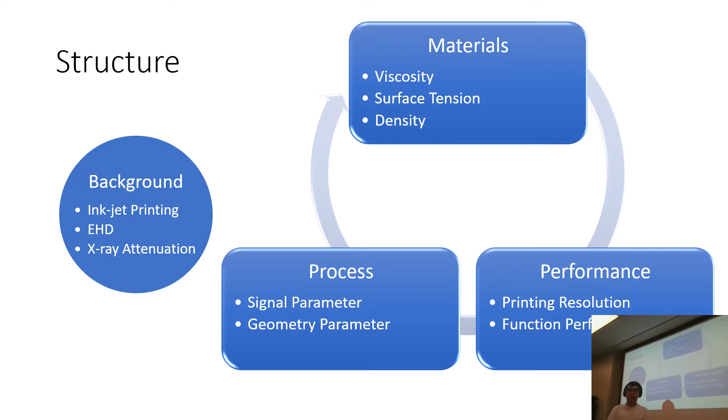This is the overall structure of what I'm going to talk about today. We'll first talk about the background, giving several introductions on the mechanism and application, as well as some basic background information for evaluation and characterization. After that, we'll jump into materials, since there are several material factors that impact this process. Since we're impacting the process, we'll discuss what kind of process we can control electronically as well as the geometry of the actual printing. After that, printing performance is evaluated both for resolution as well as some functional performance such as X-ray or height stacking performance.

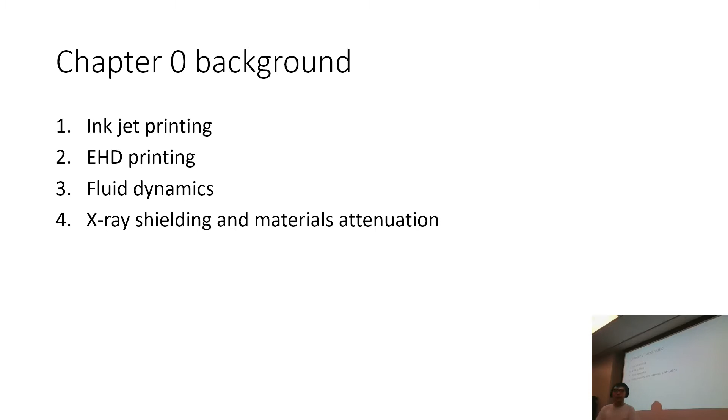So let's go to the background. We're going to introduce some background on inkjet printing, EHD printing, fluid dynamics, as well as X-ray shielding and materials attenuation. For inkjet printing, first we initially created the so-called continuous printing, indicated here.

For continuous printing, the droplets continuously deposit on the printing substrate. If they don't, there is a separate mechanism to collect all those unwanted droplets into a recycle process. However, this recycle process creates a lot of troubles, so developers started to think about reducing or eliminating this mechanism.

This led to the droplet-on-demand type of method. These methods only produce droplets when required, so there's no waste of ink droplets.

Later on, there were two different mechanisms or styles for DOD printing: one is vapor or thermal, one is piezoelectric. For thermal, the ink needs to be vaporized to create a bubble, so the ink can be pushed out to form the droplet. Otherwise, piezoelectric materials induce acoustic mechanical waves to eject the ink droplets. These methods were developed by HP, Canon, Epson, and Brother.

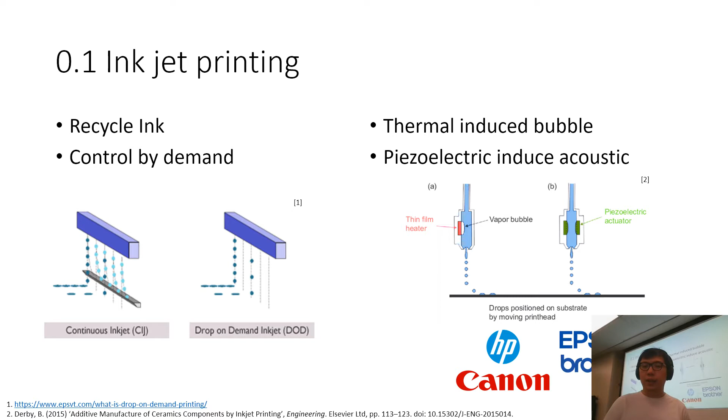Later on, depending on the requirements for resolution of inkjet printing, we need higher and higher resolution, so EHD came out. Both thermal and piezoelectric DOD are based on hydraulic pressure - no matter if it's vapor pressure or mechanical wave, it's hydraulic. However, if we need additional forces, electric forces come into play.

So we have a computer-controlled pressure regulator as well as a voltage signal generator. With an amplifier, we have enough voltage to control the electric potential accumulated on the tip of the nozzle.

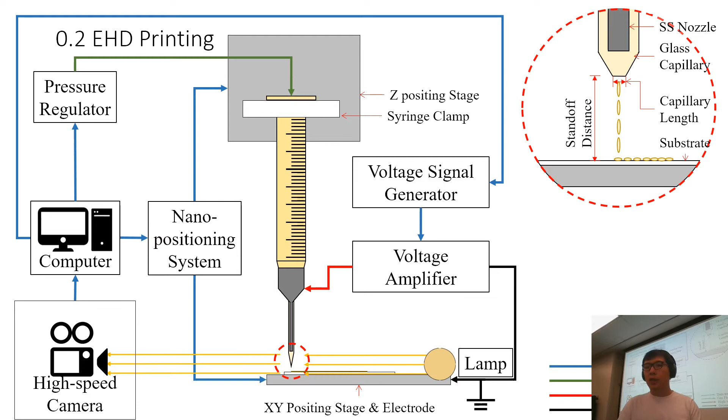Then, with the nano-positioning system as well as a high-speed camera, we can capture images during actual printing. This is what happens at the tip of the nozzle when printing occurs. An electric signal comes in with a certain voltage, and with certain material properties, a single droplet smaller than the nozzle can be created and deposited on the substrate. Later on, we can examine it by microscope.

Why EHD? As previously mentioned, it increases printing resolution and doesn't require materials to be vaporizable like thermal DOD does. For piezoelectric DOD, there are certain limitations on viscosity - we don't have that, and we can do fast prototyping for small features, which is why EHD comes into play.

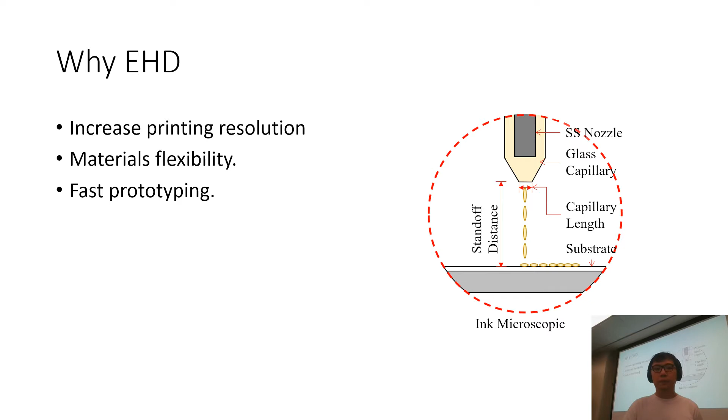For fluid dynamics, this is a typical guideline on material properties - how material properties come into play for ink formulation design. There are two significant numbers: one is the Weber number, one is the Reynolds number. These two numbers are used to guide the formulator in designing the ink.

Typically for traditional inkjet printing, DOD or continuous inkjet printing, the Z number, which is 1 over OH - here is the OH definition - needs to be smaller than 10 or larger than 1. However, with additional electric forces, we can expand this limit of 10 up to 14.

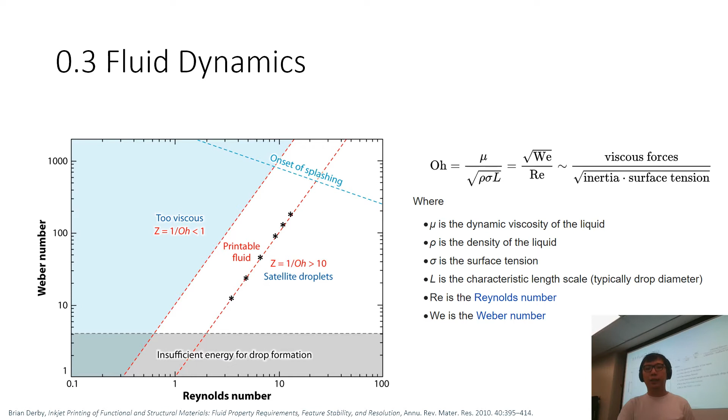For my formulation, most of the cases fall exactly on the line of 10, which creates a tricky situation where those inks are specifically suited for EHD printing, but not suitable for inkjet printing, or it's risky to try them on inkjet printing. And this is a schematic on how X-ray shielding and material attenuation come into play.

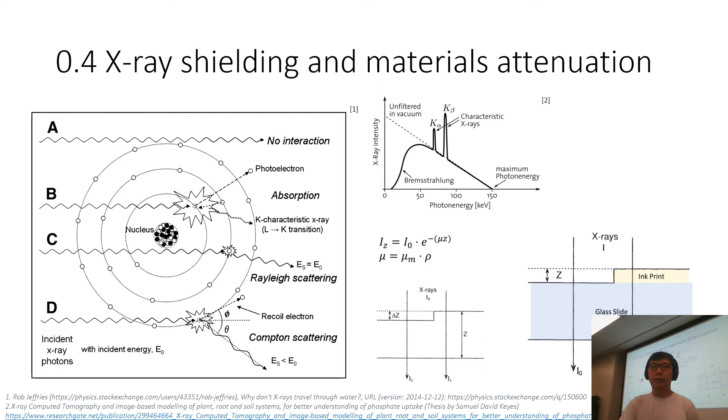So let's jump into chapter 1, where we talk about the materials. My study is basically focusing on two materials: one is silver, one is tungsten. Let's get into it and see what's going on inside the materials.

Ink formulation: what materials we're putting in the ink, how to synthesize the materials, what modifications we do, and why we need to do those modifications.

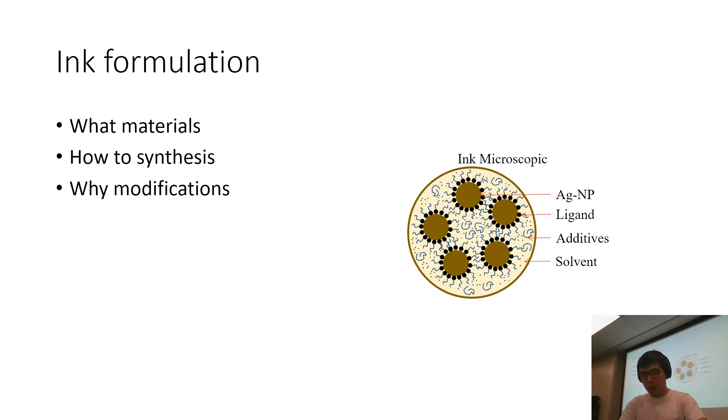For silver, this is a typical process where we're coating PAA, which is polyacrylic acid, onto our silver, which is silver metal reduced from silver nitrate. After that, it was sonicated and washed and extracted by ethanol, since ethanol is not a welcome solvent for PAA-coated silver, so we can precipitate out all our silver particles, and after several rounds of centrifugation we can get our particles.

So this is a typical DLS evaluation on the size as well as the zeta charge. Also confirmed by X-ray, our average particle size is 180 nanometers.

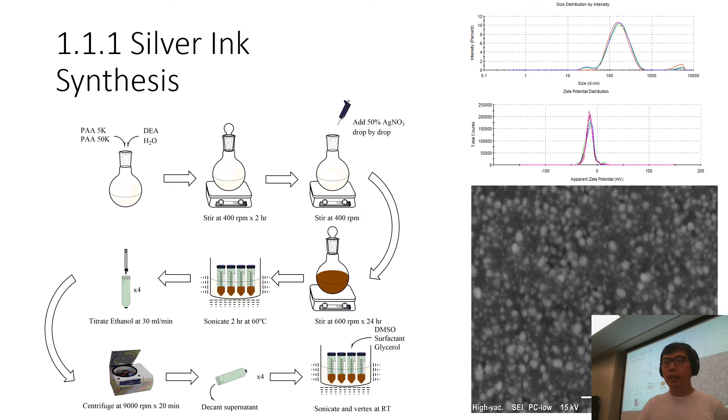Next, we'll talk about solvent. Without the liquid, we cannot carry all those particles to use as a fluid to perform inkjet printing, so we need to find a proper solvent. There are two choices.

Why not water? Water is a good solvent and it's recommended by the original publication. However, water is not suitable for EHD printing because water is really easy to vaporize. It has a higher vapor pressure and lower boiling point compared to TGME or DMSO, which creates a problem when it's actually printed. The water-formulated ink can clog the tip of the nozzle, creating unstable printing performance.

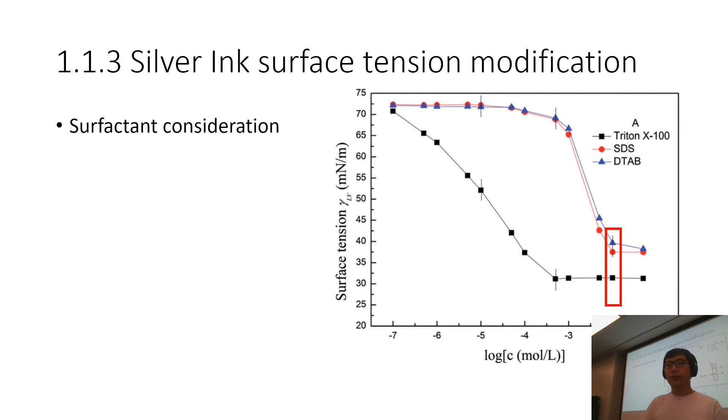So how do we evaluate the surface tension number? We're basically using ImageJ, which has a particular algorithm that can calculate the surface tension based on the pendant droplet method. We're using high-speed cameras to capture the last image as the droplet leaves the tip, and we can use that as a reference to calculate the actual surface tension.

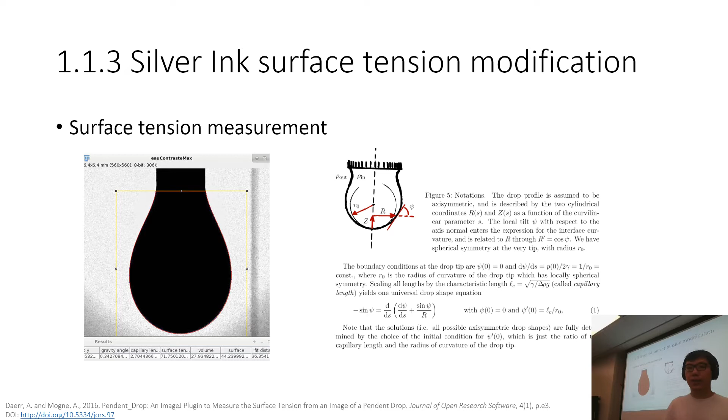For different Triton-X, we have different HLB values, which is how much the surfactant likes water. As the HLB value increases, the surface tension increases since it likes water more, but the viscosity also slightly increases. We don't want that. What we want is to change only one parameter, in this case surface tension, without changing viscosity or dielectric constant.

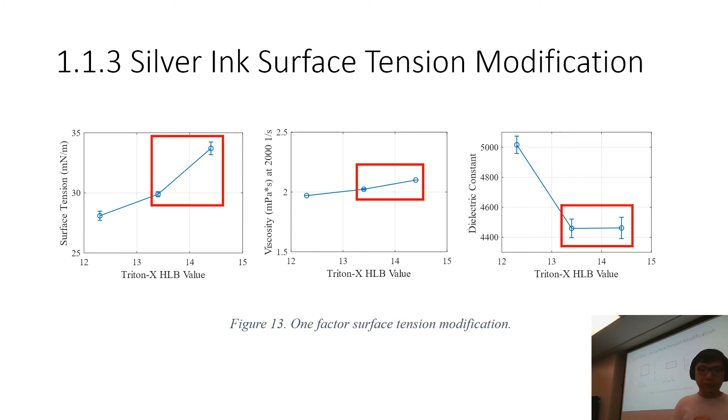So this is not an option.

For viscosity, what we're using is glycerol. Since glycerol is 2 or 3 orders of magnitude higher viscosity than water, we need to add a really small amount so it can dramatically change the viscosity. As we can see, from 0 to 5%, we change viscosity from below 4 to almost 8.

However, glycerol also changes the surface tension as well as the dielectric constant quite a bit above 5%. So we're careful to introduce glycerol at less than 5% to control the surface tension shift, while still having a large range of viscosity difference.

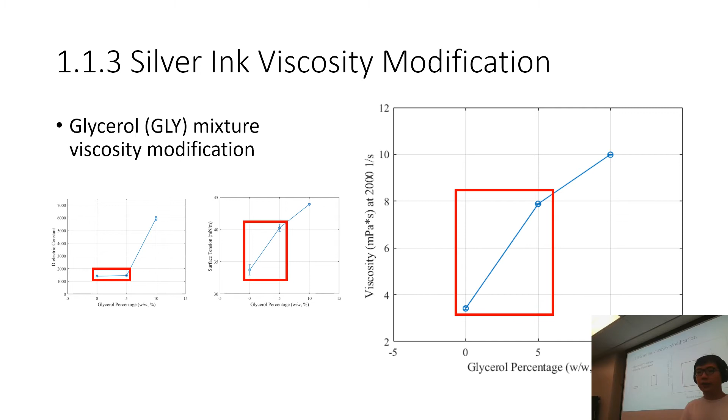For permittivity, which is how much charge a single droplet can carry, it depends - it also makes a difference when the droplets are actually flying from the tip of the nozzle to the substrate. We need to consider that most of the charge accumulates on the surface at the interface. So what we're doing here is introducing more silver particles to create more interface.

Here you can see from 30 to 40 percent silver increase, we dramatically increase the dielectric constant by an order of magnitude. However, we also increase the surface tension as well as the viscosity. So we need additional surfactant and glycerol to reduce these changes while increasing the silver content.

So this is what finally came out. For S1, S2, S3, we control surface tension while the dielectric constant and viscosity don't change much. For viscosity, we have V1, V2, and V3. For dielectric constant, also called permittivity, here we have P1, P2, and P3.

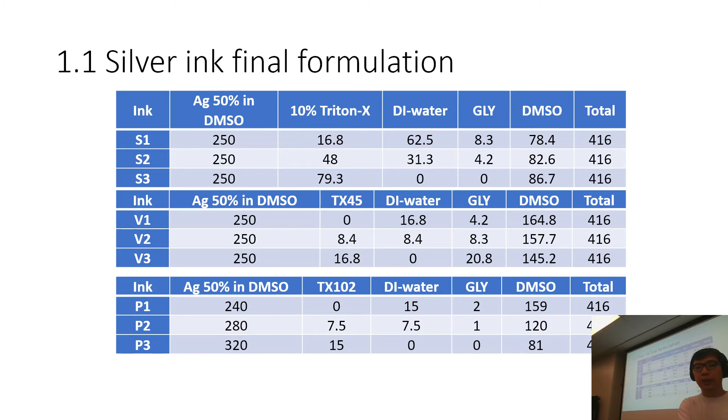So what we need to do is create a mechanism or process to classify all the different sizes of particles. Based on some patterns we found online, centrifugation is a really good method. However, we need to discover what kind of dispersing liquid can carry the weight of those particles.

So I did a bit of design using ethylene glycol and glycerol to create a mechanism with tunable viscosity for my dispersing fluid. With that, we can use centrifugation to test what kind of process varies the performance - varying the speed, the centrifugation time, as well as the viscosity.

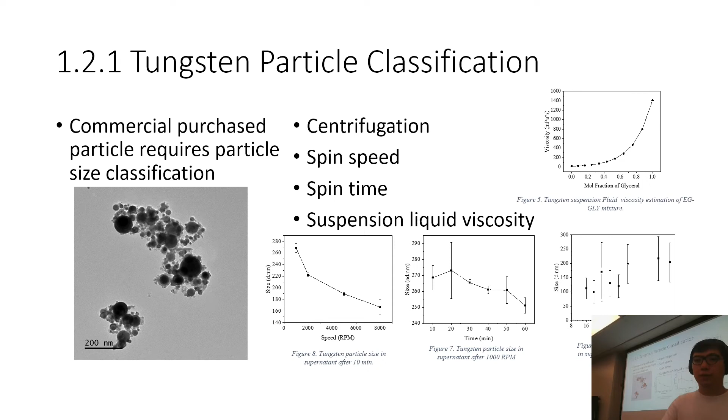With that, I was able to separate the particles into three different sizes, while they have different viscosities as well as different zeta size and zeta charge.

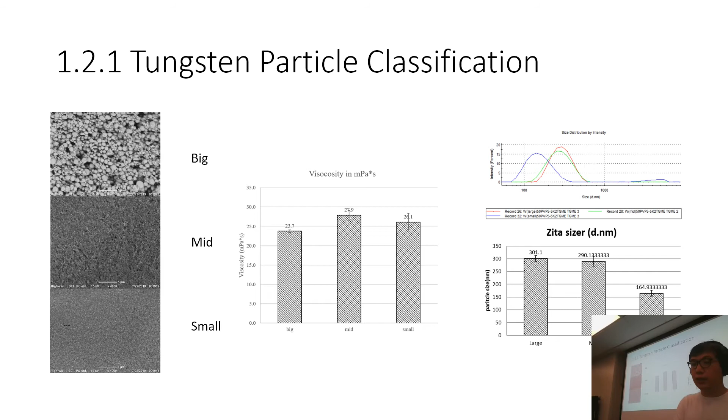So with all the silver and tungsten particles being separated and synthesized, we're moving on to processing. What we're focusing on is how to get the droplet smaller than the tip of the nozzle and deposit it onto the substrate. Again, the silver as well as the tungsten are being introduced.

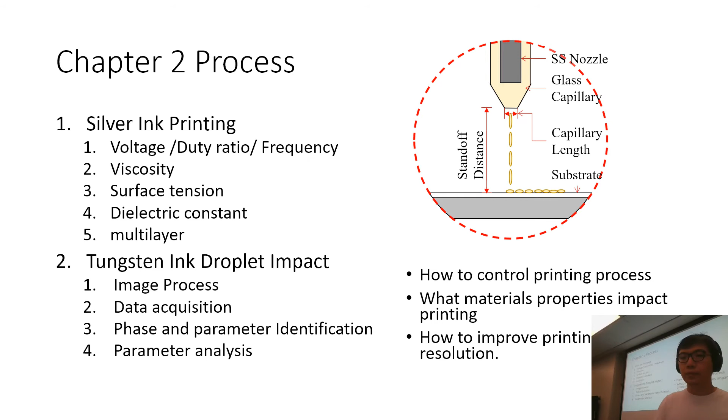For silver printing, as you can see in the images, we have different samples. We can print dots, we can print lines, we can print circuits, and we can use a confocal microscope to scan them and find the heights of the printed parts.

For dots, we need to evaluate how stable the printing will be. So what we have here is a 300 millivolt print on a 26 gauge nozzle.

This is a DC print without any signal generation. We can still have a 12.5 micrometer average diameter, plus or minus 1.16, with an error rate of 9%, which is less than 10, confirming we have a stable print.

On the B chart, this is a strain gauge reliability test and pattern design - how fine or dense we can design the lines so we can produce a high strain gauge factor sensor. Here the line spacing is 500 micrometers.

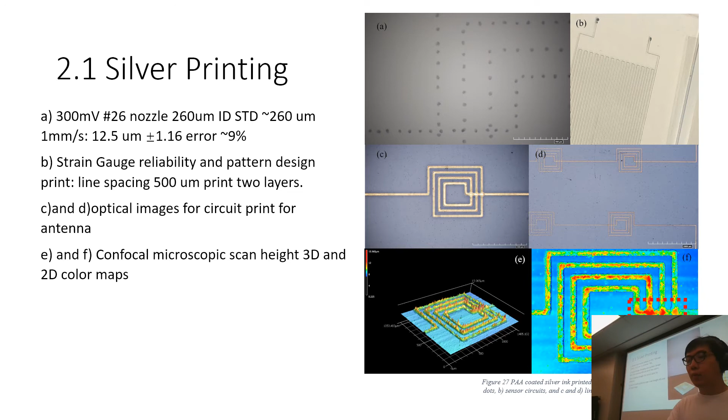We can control the pattern's resolution to less than 50 micrometers. From confocal microscope images, we can see when printing crosses over on top of each other, they create a higher height of the actual print, which indicates the ink or printing performance is stackable. So the more layers you print, the more height you can stack onto.

So there are several printing parameters we can control. Here's a schematic of what kind of signals we can do. Previously this was DC, so here is AC. We have a frequency that controls how fast this cycle happens per second, measured in hertz. For a total cycle time, there is a portion where we perform a high signal, higher than 0 volts.

With all those three control variables, we can see with voltage differences, we have quite a difference between the diameter. However, with frequency change, the power law fitting lines don't have as high an impact factor. However, with the duty ratio, which is how much charge per cycle, it does change a lot, around 0.95, almost equal to 1. That's much higher impacting than the frequency.

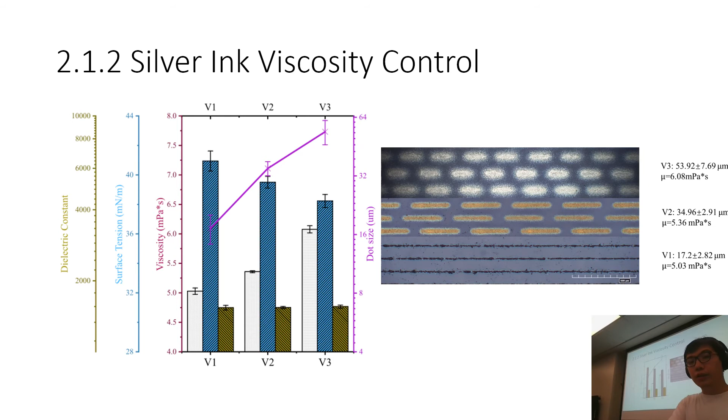For surface tension, basically the process is to break the surface tension, or create another surface, which needs energy to overcome the surface energy. When the surface tension increases, the droplet size decreases.

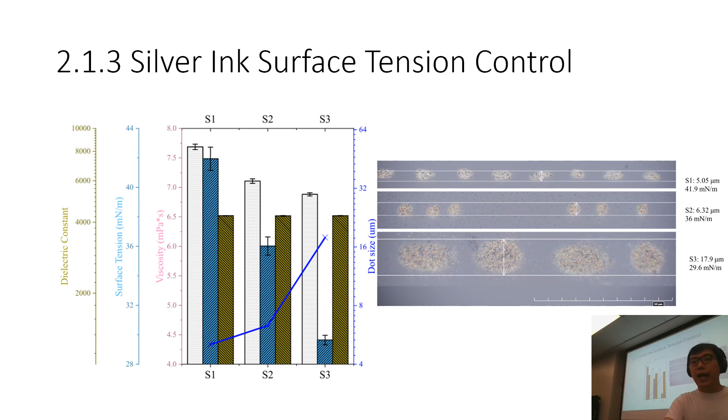That also makes sense, because when we have more and more surface tension density, a certain amount of energy required for a smaller droplet is the same as for a bigger droplet if the surface tension is small. So we're creating a balance or equilibrium between the surface tension density and the surface energy that can be introduced per droplet.

For dielectric constant, with a higher dielectric constant, shown here in the yellow bar or green bar depending on the projector, it requires less silver, or less volume for the charge deposit to overcome the surface tension, which makes sense here. The droplet size is decreased.

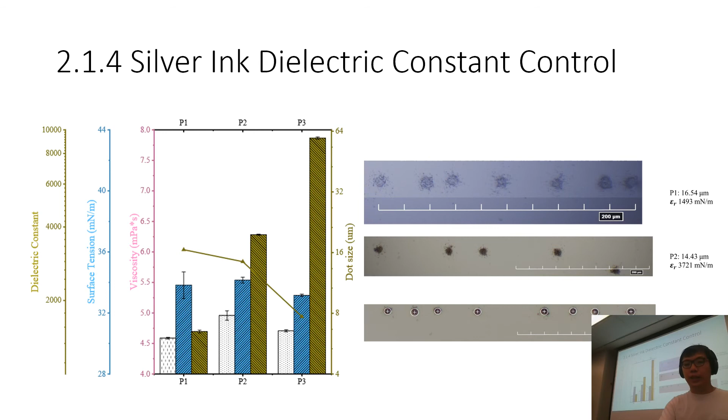We also perform multi-layer printing. Basically what we do here is print different layers of silver onto the substrate to see how wide they can spread. Be careful: this is a non-waiting-time print, so there is no waiting time between layers. So when the next layer of droplet is deposited onto the original droplet, it may not be fully dried.

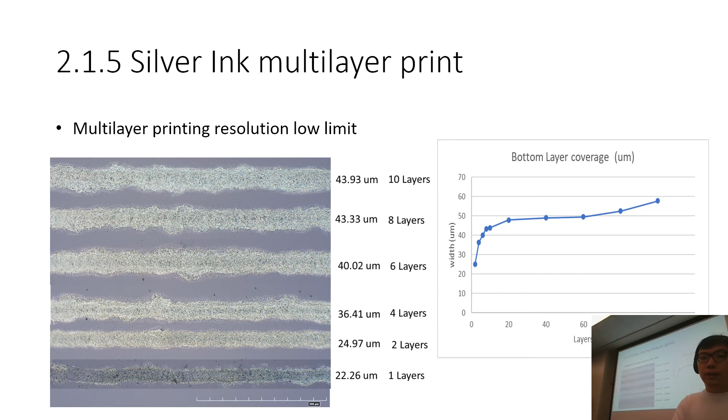So what we have is, when we're increasing the number of layers, we are increasing the width, which needs to be justified because when we actually produce a sensor, we need a wider spread or lower line density, because we don't want this line and that line to be shorted so our function can be properly functional.

Then we're characterizing tungsten droplets. For tungsten droplets, we're using high-speed cameras to capture images, specifically focusing on the behavior when they hit the substrate.

Here are the parameters that we can capture, and here's the process of how the machine or computer code can process it: this is the angle, this is the width, this is the height. So finally, for each droplet, we have those four data lines. For different cases—gravity only, and gravity with electric forces, which mimics our actual printing—the droplets are elongated before they hit the substrate.

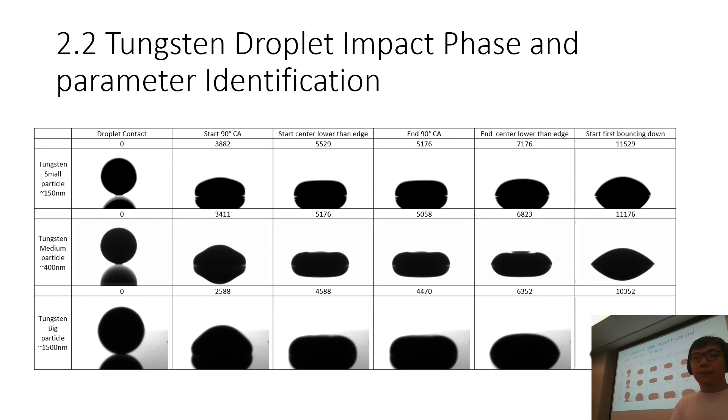So with that, we have three different types of particle size formulated ink. This is the image-like summary of how the droplets are hitting. Obviously this is a circle, so this is the performance without the electricity.

With all that data, we analyzed it and discovered that the phase duration and height of the droplet increases while increasing the particle size of the formulated ink, both in the gravitational field and the electric field. That makes sense, since larger particles are less responsive compared to smaller ones because they have a larger momentum. So the response time is quite large, and since they occupy a larger volume, the heights are also large.

For a large particle sized ink, it also results in a large diameter, since they have a larger volume under the gravitational field, but a smaller diameter under the electrical field, which here is the explanation.

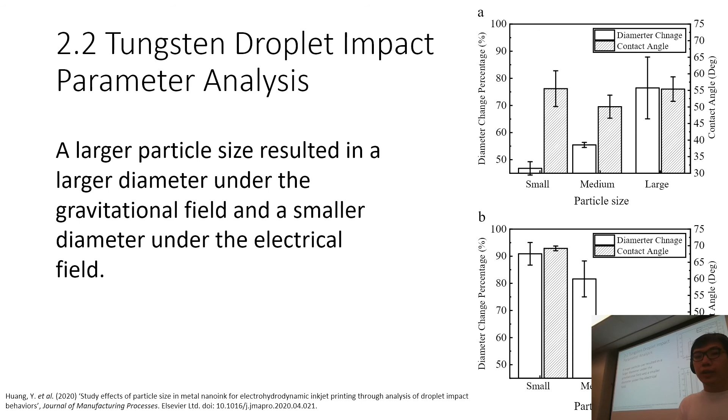A large particle has a smaller surface-to-mass ratio, which at the same particle content level means a smaller sized particle formulated ink has a larger interface area that can carry more charges, resulting in a larger diameter.

For a droplet with medium particle size, it has the highest impact initial velocity among the three particle sizes. This may be due to both the surface effects and the viscosity. If the viscosity is too large, as for the large particles, it doesn't want to move, which is related to the viscosity. However, for a smaller particle size, they may have a larger impact from the electrical force.

However, it also has a smaller droplet size, so it may inevitably feel the electrophoresis effect smaller, which is also due to the resistivity of the air, since we're not printing in a vacuum. It also feels the resistance, which decreases the velocity.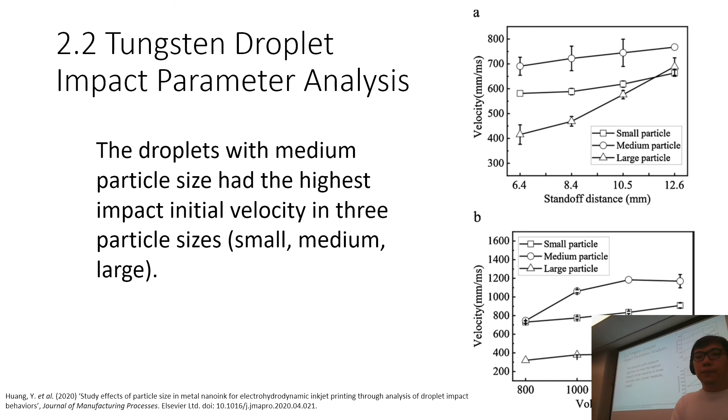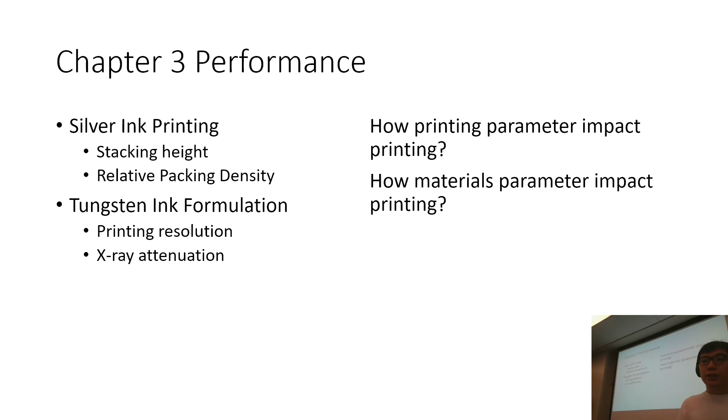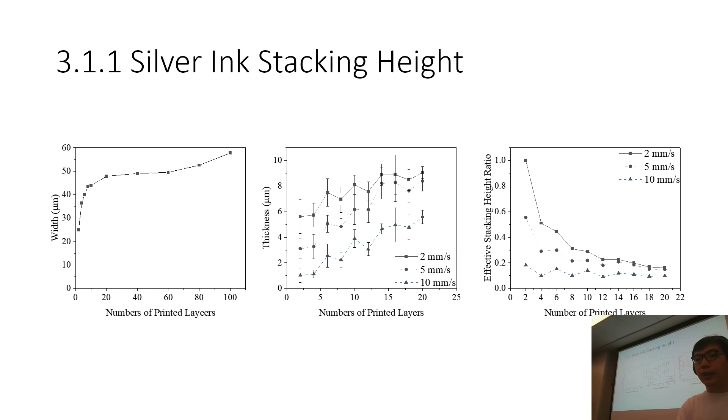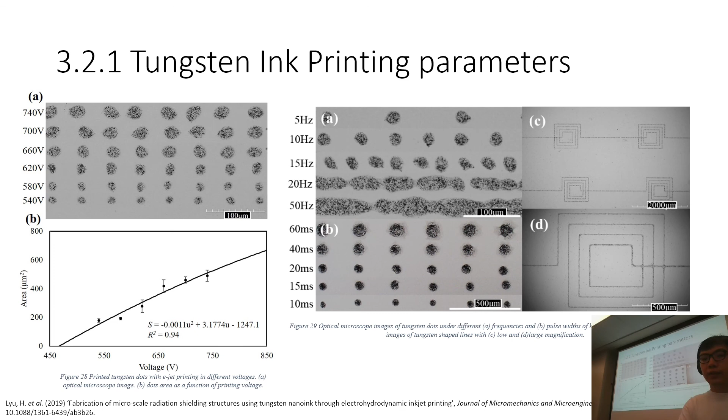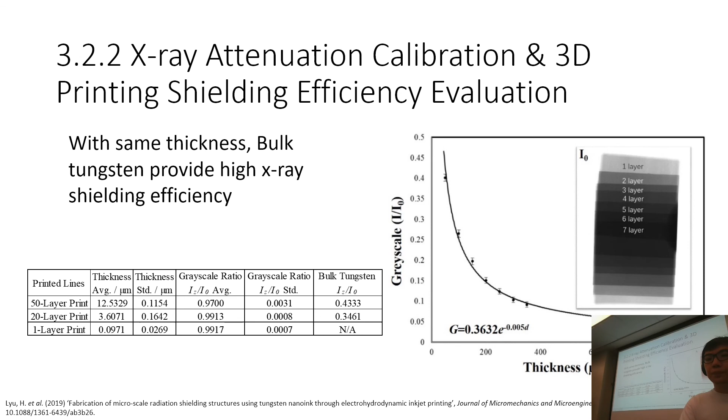For conclusions, ink properties impact the printing performance, such as viscosity, surface tension, and dielectric constant. Printing parameters impact the printing performance, such as voltage, duty cycle, and frequency. Even though frequency does not impact it that much, it is still impacting it.

Both ink properties and printing parameters impact functional performance, as we can see in the stacking rates as well as the X-ray attenuation. Further characterization of the electronic conductivity of the printed silver lines is needed, since we're going to produce sensors.

Optimizing the packing density of printed tungsten lines is also needed, since we want to improve the shielding efficiency of the printed tungsten.

Optimizing the conditions to improve the printing resolution for both tungsten and silver. We want to find a better condition that can print finer and finer features that can be applied to some applications, as well as high aspect ratio microscopic parts for functional electronics. We're also looking into achieving a higher stacking ratio while printing.